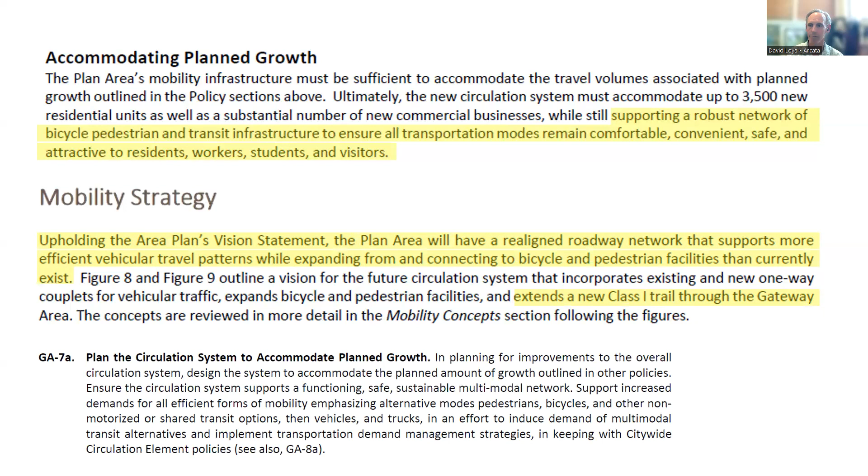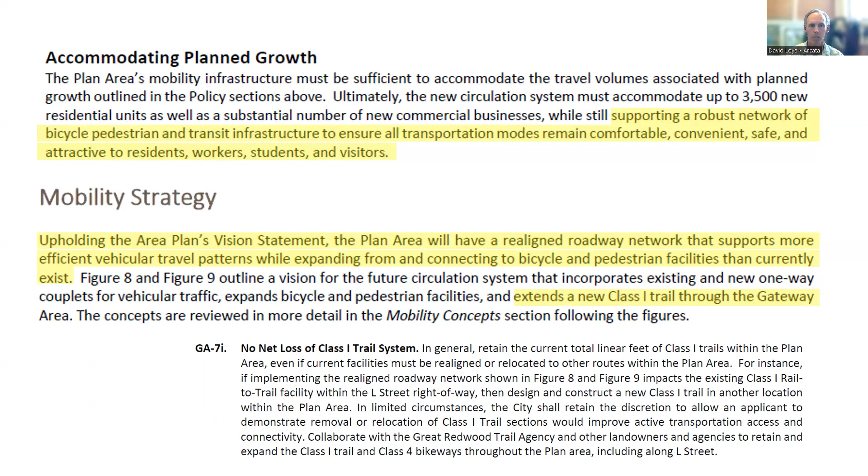Looking at the proposed language the Planning Commission recommended to the City Council regarding the planned circulation network and trails specifically, Planning Commission and committees recommended the transportation system emphasize alternative modes over vehicles in policy GA7A. The Commission went on to recommend no net loss of the Class 1 trail system. These are the multimodal trails you see along Foster to L Street and out to the Bay Trail. So no net loss of these trails.

The policy and strategy are generally depicted in figures 8 and 9 of the plan. Figure 8 shows the planned vehicular circulation network emphasizing the proposed changes. And figure 9 on the right shows the existing and planned alternative modes of transportation, including bike and ped trails. Let's take a closer look at the trails first.

This image depicts the Gateway area and surrounding areas slightly grayed out with the existing facilities, multi-use path, class 2, 3, and class 2 and 3 bike routes and bike lanes depicted in the solid lines. You'll note in the center of the field of view is L Street. The L Street corridor is our current existing multi-use path. That's a class 1 trail.

The proposed facilities are shown in dashed lines in these figures. I want to draw your attention to the number of new class 1 separated multi-use trails that are proposed. Notably N as in Nancy Street, which connects to the west side of the Creamery District, is proposed to be extended from Alliance near Shay Park to Samoa along or near the existing rail corridor. The precise location of these trails will be determined in pre-development planning.

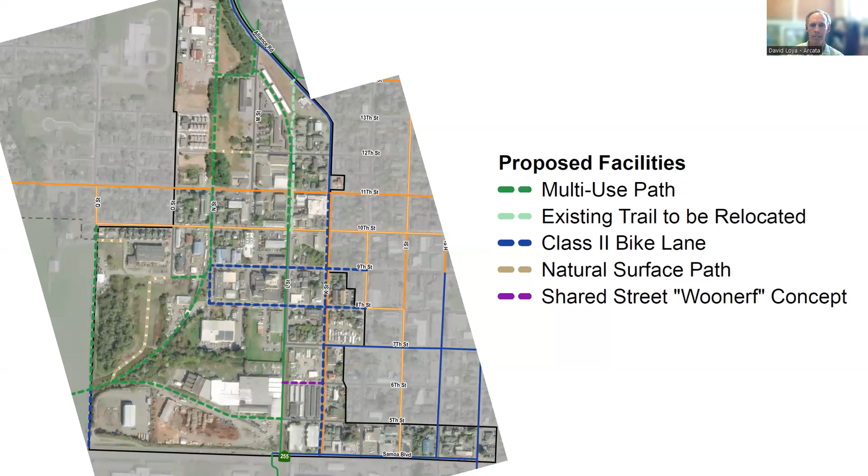Now that we've looked at the trail system and understand that no trails are being eliminated and that the plan proposes the addition of several new trails and bike lanes, let's take a look at the proposed road systems. The road systems are going to have to adjust from their current configurations to accommodate these new trails and to create the types of improvements in safety that we're seeking.

Okay, so zooming in on that map and putting it into the context of the larger area in this aerial image. The plan proposes to continue the one-way couplets in the downtown on 8th and 9th Streets to connect the Creamery District with the downtown. These roads will enhance the walking and biking experience and reduce the drive lanes considerably, emphasizing these alternative modes.

There are several diagrams in the Gateway area plan that you can view on our website to see what's proposed for 8th and 9th Street, but I really want to emphasize and focus on the K and L one-way couplet that's being proposed because it's been the focus of community dialogue to date.

Let's start by looking at the existing conditions on K Street. Currently, K Street works well enough for vehicular traffic. There are north and southbound lanes and parking on both sides of the street. While the current level of service, a measure of traffic congestion, does result in some peak flow traffic impacts, these levels are considered acceptable locally. The city has a long history of accepting poor level of service as part of its travel demand management and mode shift strategies. The idea being that folks will use other modes of transportation if vehicular traffic isn't working for them.

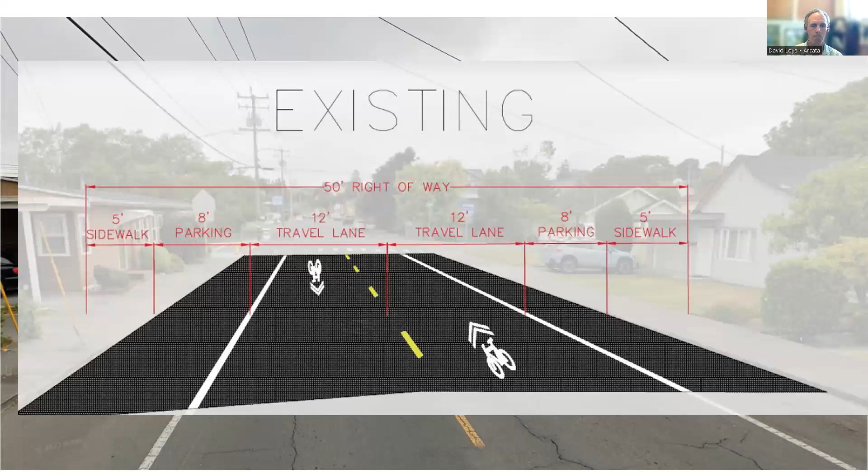For pedestrians, the situation is acceptable, but it could be better. There are 5-foot sidewalks on either side of K Street, and the crosswalks are well marked. However, crossing this street requires approximately a 40-foot path of travel across 2 ways of travel lanes and 2 rows of parking. So there could be improvements here.

Again, one of our main objectives in updating the mobility network is to enhance the walkability and bikeability while improving the connectivity between downtown and the Gateway area. Currently, to make that transit from downtown to the Gateway area, you have to cross larger crossings with longer pedestrian exposure. And there are several design elements in the proposed plan that help to resolve these concerns.

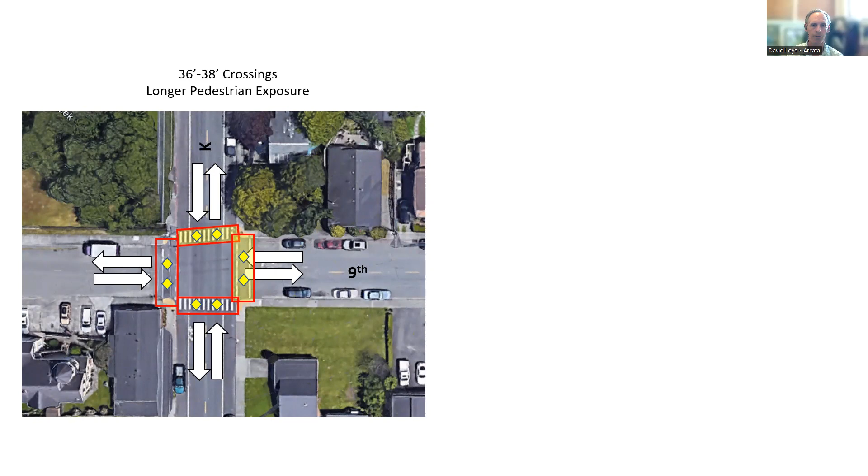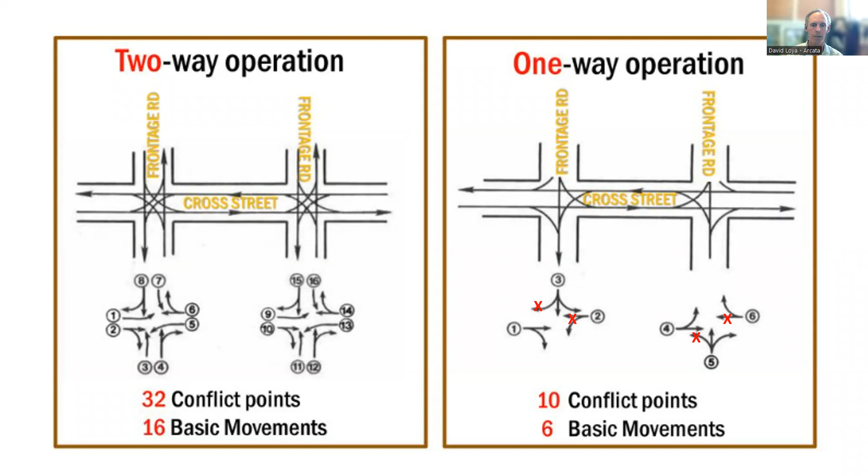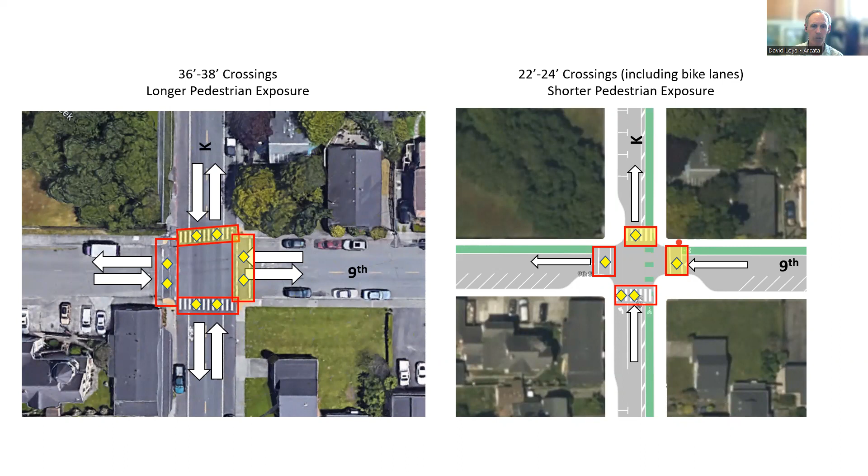Here you see the current on the left and proposed crossings for K and 9th Street. The number of conflicts is greatly reduced here by reducing transit from 2 lanes both ways to 1 lane one way. Again, this is a very well-designed set of one-way couplets where the number of conflicts is greatly reduced. There are separated bike lanes on both K and 9th Street. Crossings are reduced to a maximum of 24 feet, and the bulb outs and crosswalk design help calm traffic as it approaches these intersections.

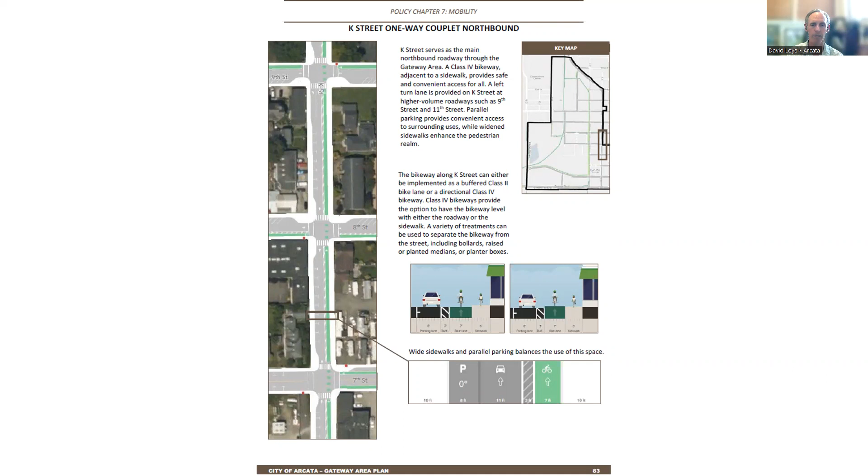Let's take a look at what the plan proposes for K Street. From this vantage, you can see that K is proposed as a one-way northbound with either a separated or completely segregated bike lane, wide sidewalks with bulb outs at intersections, and parking on one side and high visibility crosswalks. Let's take a look at a typical cross section.

Now this is the plan view and a visual with the rendering of northbound one-way on K Street. By creating one way of travel, you reduce the travel lanes considerably, creating plenty of room for doubling the size of the sidewalks on both sides of the street. So instead of 5-foot sidewalks, we have 10-foot sidewalks planned.

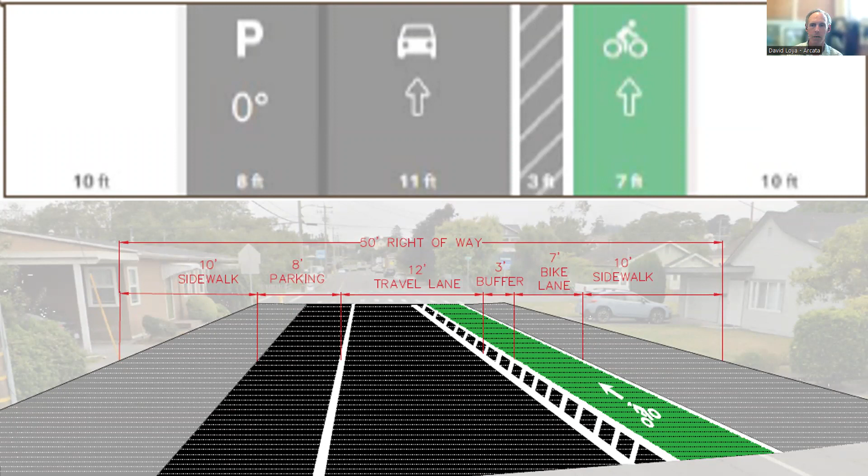There is also added room to create a wide unidirectional bike lane and a buffer. Now this bike lane can be either just separated by that buffer, or we can enhance that separation further and create a full class 4 bike lane here. And this proposal does retain parking on one side.

If the plan view and the visualization didn't work for you, looking at the street view, here's another visualization of a typical for K Street. And again, you'll note that the class 4 segregated bike lane is created by elevating the bike lane to the elevation of the sidewalk instead of requiring the bike lane to be on the same level as the road. That creates that segregation. You'll note also the broad sidewalks and one drive lane here.

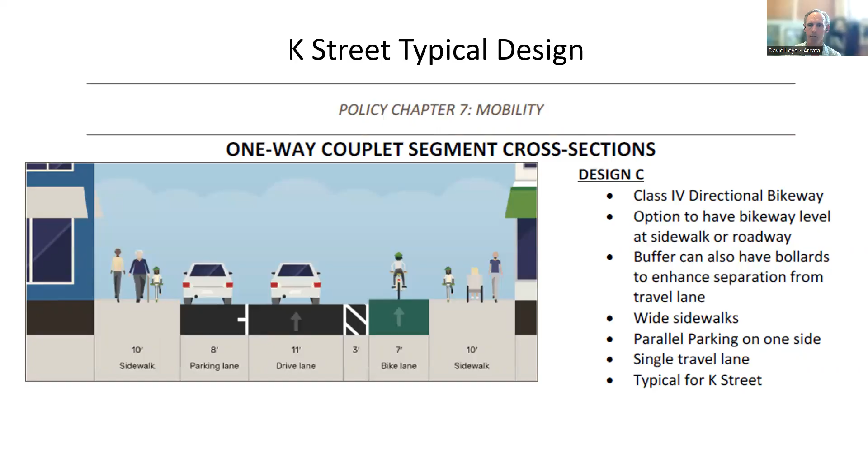Now let's look at the proposal for L Street. We'll take a look at the alternatives in a moment, but first I want to review the current condition of L Street and what the gateway proposal recommended by the Planning Commission is. Currently, L Street is open between 11th and 7th to local traffic only. There are bollards preventing traffic from entering at 11th Street. The road is open on one small segment north of 11th Street, but it's otherwise impassable by vehicular traffic.

This is also where the current location of the L Street portion of the Bay Trail is located. It's concurrent with the road on this segment. This portion of the Bay Trail, as well as the second segment between 10th and 11th, are actually shared with the road. While this is an extremely low flow, local traffic only portion of L Street, the trail is not technically a class 1 multi-use trail in this segment since it's on the road.

The reason I emphasize this is because the gateway proposal does make this segment fully segregated from the road. And so the current experience that you have entering the road and sharing that low flow traffic would be eliminated in the future, and the trail along the entirety of L Street would be completely segregated.

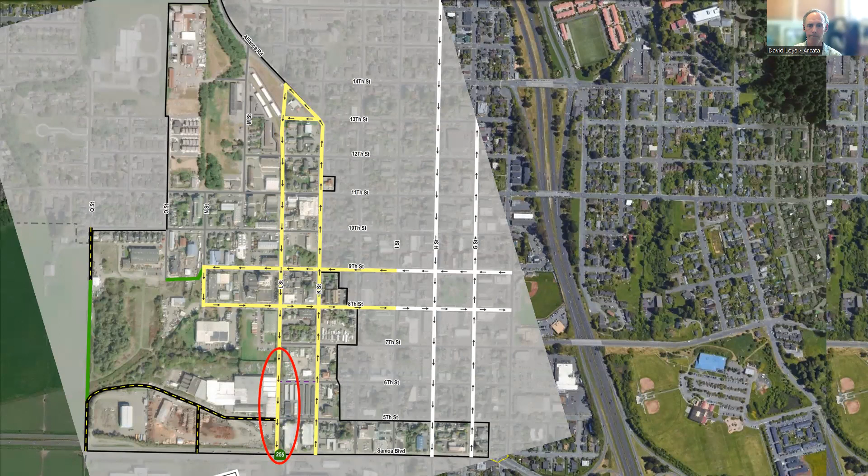Okay, getting back to L Street for a second here, L Street also does not extend south of 7th Street. So there are current gaps in the flow of traffic from L Street, some created by our bollards, others that are just a factor of L Street never having been developed on those segments or having been abandoned. On the portions of L Street that are open to vehicular traffic, there are 2 vehicle lanes going north and southbound and 1 parking lane.

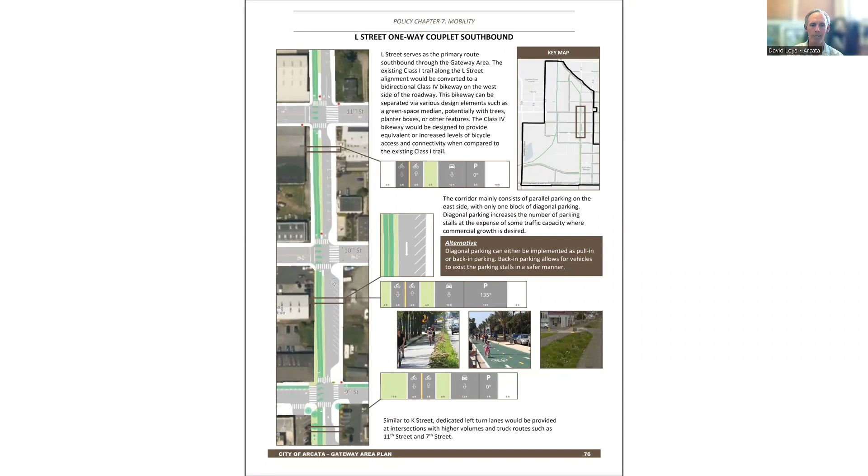Let's take a look at what's proposed in the plan. Again, you can see from this vantage that much of the proposal for L Street mirrors the K Street in many ways. There's 1 lane of traffic, southbound this time, broad sidewalks, bulb outs, and high visibility crossings. The one notable difference is the existing multi-use trail remains, and it is enhanced by the gateway proposal. Let's look at the plan more closely. I'm going to zoom in on this plan view.

You'll note that this plan view shows the orientation with north up. This would put the Creamery building on the left side, but let's look at this as the plan would be viewed southbound, the way vehicular traffic would flow. So we'll turn that all over. The plan calls for retaining and expanding the public sphere on the west side of the trail to enhance the linear park features that currently exist.

Some properties have already contributed to a park-like feel. The Creamery building, for example, has maintained landscaping, benches, public art, all of which have the feeling that that landscaped area, which is actually on private property, is part of the public sphere. The plan calls for expanding and adding to this, requiring developers and property owners to contribute area to the west side of the trail to create that broader linear park feel.

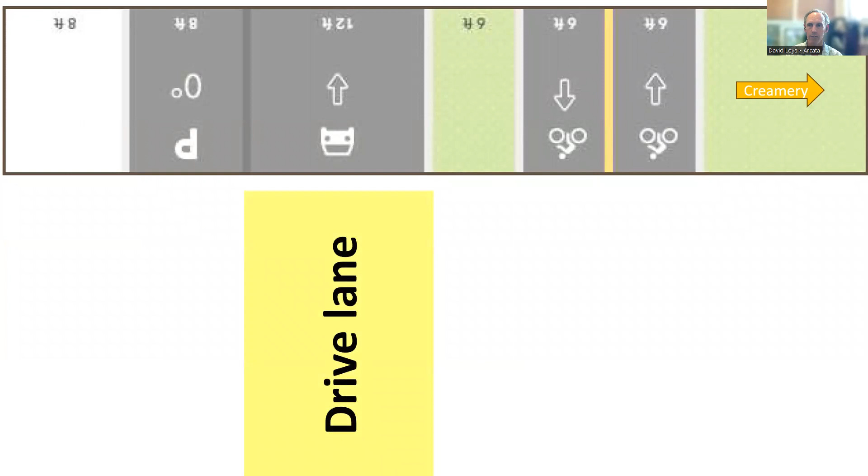The plan proposes retaining the multi-use trail, as I've mentioned earlier, and the vegetative buffer, creating that separation from the travel lane. It does propose to open a single drive lane headed southbound and retain the parking. Lastly, it retains the sidewalk. Let's take a look at what that might look like on L Street south of 8th. You can see here that there's really not much change to the existing physical conditions, some restriping, repaving to touch up the road and that sort of thing.

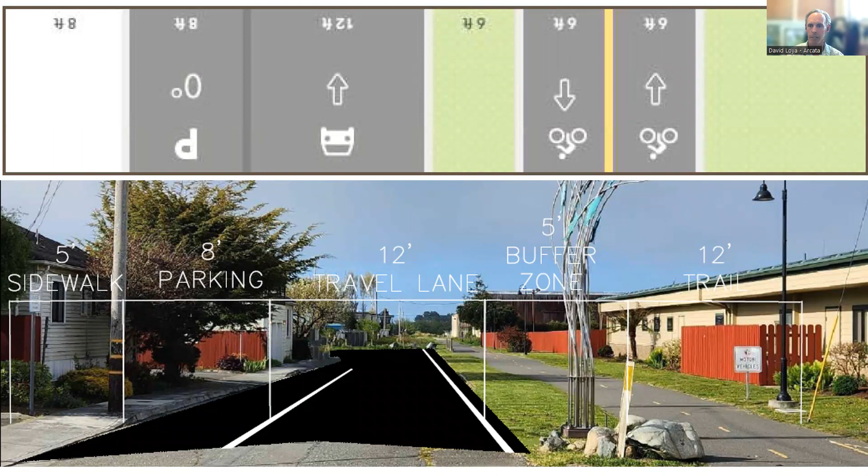And while this would become a primary southbound road under the Commission's recommended proposal, the road design would emphasize reducing travel speeds through several road design elements, some of which we've already discussed, like narrowing lane widths, bulb outs, and other environmental design elements. So you see here the trail is retained, the buffer zone is retained, one direction of travel instead of two. This would be through traffic, not just local traffic, parking, and then sidewalk.

Looking again, image from L and 9th, here's another way of thinking about it. The existing travel lanes would be converted to one-way, southbound with a parking lane next to it. You'd keep the vegetative buffer, the trail, the separation, and the sidewalk.

I want to close out this review of images by looking at, again, the L Street typical design. This is included in our Gateway Area Plan. Showing, from left to right, the planting strip that would be on the west side of the trail, separated vegetative buffer, drive lane, parking lane, and then the sidewalk.

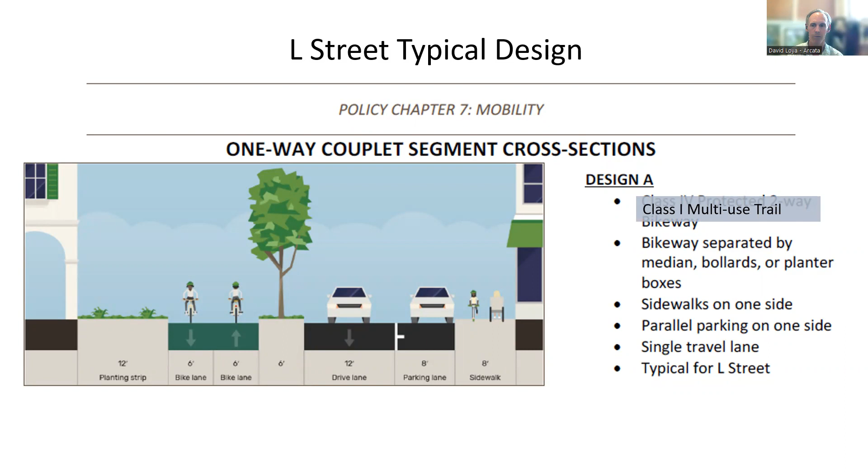I want to note that we're talking about retaining a Class 1 trail, not a Class 4 protected two-way bikeway, and so that will remain a multi-use trail. It would not be converted to a bikeway.

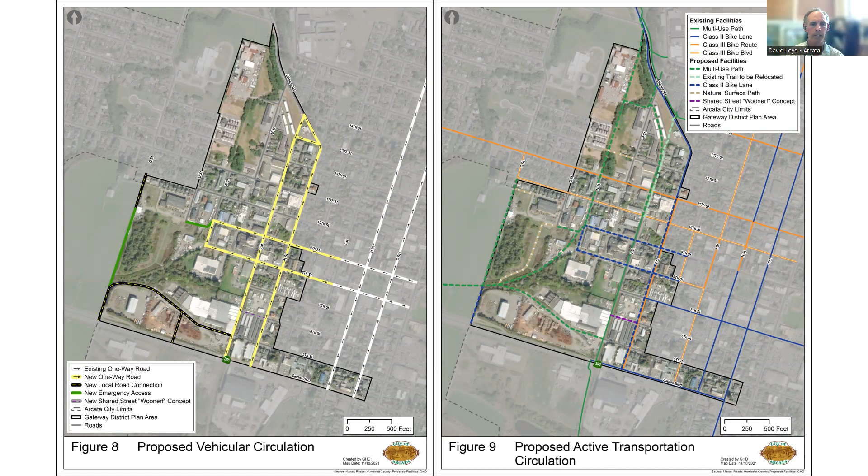This wraps up the discussion on the proposal, and I hope this helped explain the relationship between the trail, the bike lane, sidewalk improvements that are designed to improve user safety and comfort, and the proposed redesign for vehicular traffic as proposed in the Gateway Area Plan. I also hope it's clear that the city is not proposing to remove any multi-use trails, and to the contrary, the proposal is to improve the trail network, adding several multi-use trails and several bike lanes.

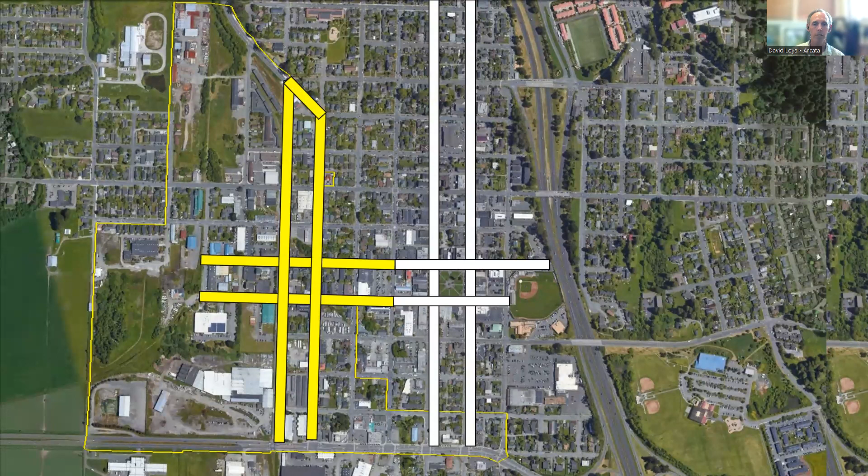Now let's take a look at the alternatives that were considered before settling on the K&L Street couplet to accomplish the alternative transportation goals of the community. Again, the purpose is to create a safer, more balanced in terms of travel mode and intuitively connected downtown and gateway area. I'm going to focus on the K&L couplet exclusively and the alternatives there for this discussion.

For alternatives to be effective, they would need to accomplish several mutual goals. First, the alternative needed to meet the safety and convenience goals for alternative modes of travel. We've seen the intersection improvements, road width reductions, sidewalk width increases, and other features that create safety and convenience for bikes and peds previously. Any alternative that we evaluated and recommended had to retain these.

Second, the alternative would need to support the infrastructure. This may seem like it goes without saying, but there are lots of routes that have been proposed that actually won't support the infrastructure ultimately that we need to build out this safer future.

Next, the vehicular routing needed to be efficient and effective. Now, some have drawn criticism against this because they say we should not be focusing on the efficiency of vehicular traffic. But the efficiency in terms of a couplet is affected by the distance between the north and southbound segments. And if the planned routing becomes too convoluted or too distant, then people will choose non-planned routes, which create traffic and safety impacts that were unintended.

And so for this reason, we wanted to make sure that vehicular routing was at least efficient enough to retain the effectiveness of that couplet and make sure that people took the planned routes that were established in the plan.

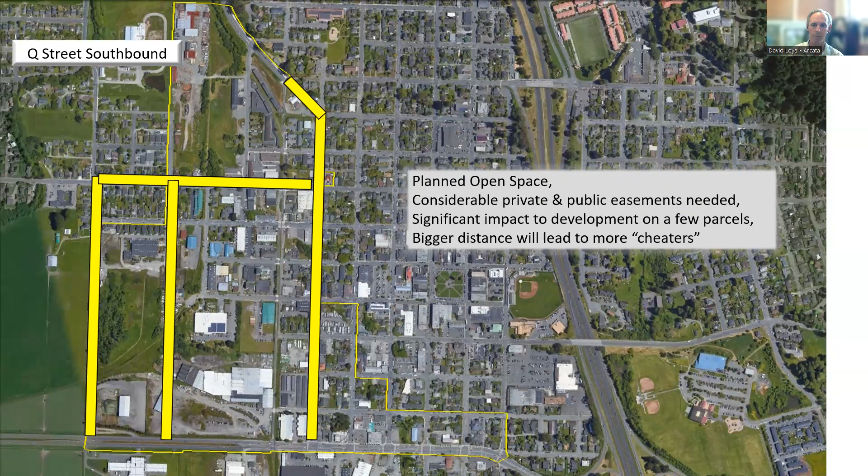Q and O have similar features. O Street is a possible alternative that was also similarly rejected because it's not as supportive of those goals and principles as L Street. Now, I do want to take a look at J Street with a little bit more attention. J Street was considered an alternative early on, and it would accomplish many of the goals and is a fairly attractive option from a mobility standpoint.

The J Street option would affect more than twice the number of current residences, however, and it's not a commercial corridor or planned one. And it would likely create more cross traffic seeking to get from J Street to the Gateway compared with L Street, which is located in the planned activity center already. Notwithstanding, J is a viable alternative to L for a couplet.

There are other ideas that have been raised that were not further evaluated because either they didn't meet the principles outlined above and the alternative transportation safety goals, or because they were variations on the theme that we've already evaluated. For instance, one alternative suggested was to make K a one-way northbound and to not designate a southbound couplet to K, letting individual drivers decide which route to take. We did not explore this further because we viewed this as planning for unplanned routing and would necessarily lead to those unintended consequences.

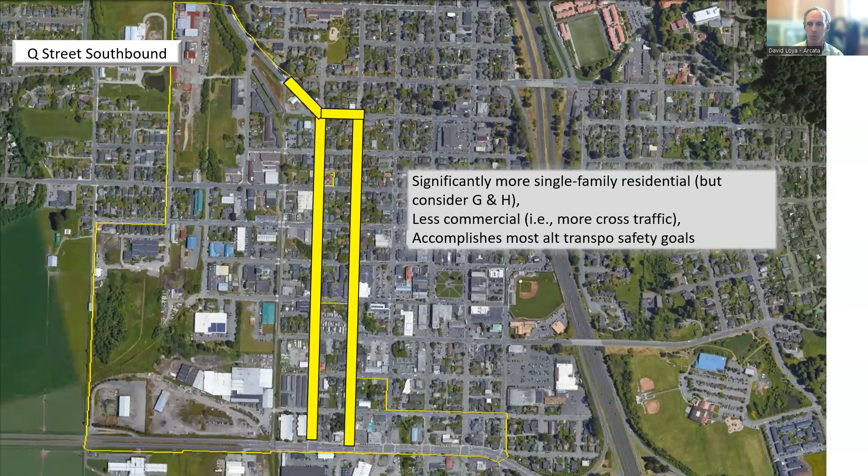So there were several alternatives that are not discussed here further that you may have heard discussed in the public discussion thus far, but this is where I will end our alternatives analysis. We did discuss alternatives to improving K Street. Staff provided several options for modifying K Street, and these options were evaluated primarily because the timing on L Street development is unknown. And so K Street will likely have to serve in the near term while easements are acquired or L is being developed. Also, we would need to have options for the near term for modest improvements to safety and traffic management on K Street, recognizing the challenges that I pointed out earlier in this video.

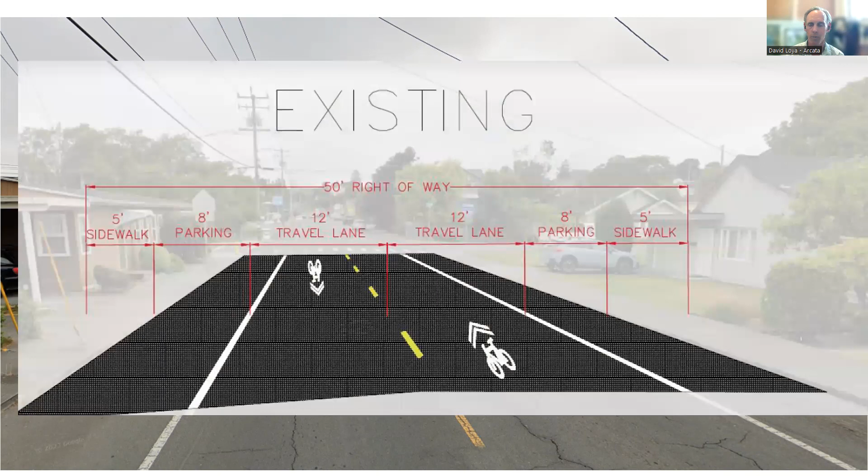To do that, I wanted to go back to the existing conditions to start the comparison. So again, we have 5-foot sidewalks on either side, 8 foot of parking on either side, and 12-foot travel lanes within the 50-foot right-of-way. One option developed by our engineering team provides two-way vehicular traffic on K Street, so it retains two-way traffic, adds bike lanes, and retains one parking lane. This option improves bike safety for sure, but it does not change the conditions for the other modes, and it does not reduce the number of conflicts at the intersections.

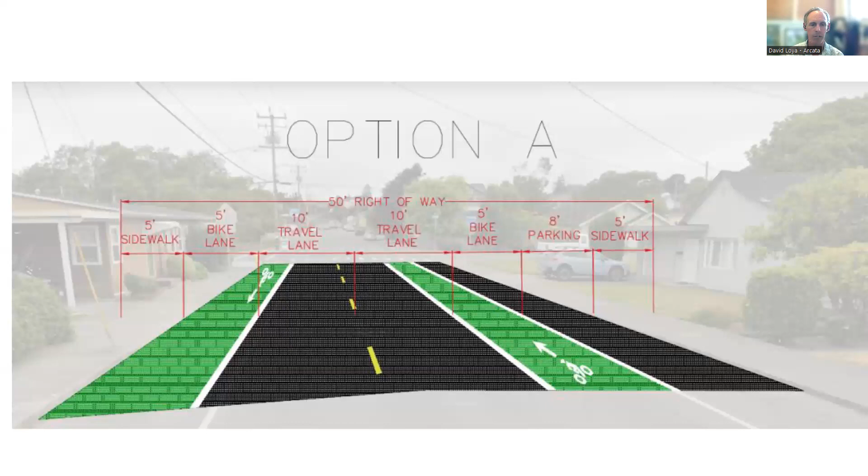This is a good interim option for enhancing bike safety, and the city will need to engage the public regarding the decision to eliminate parking and to add these bike lanes before implementing this. This option is, however, inferior to the proposed gateway plan couplet idea, and it does not meet most of the goals and principles outlined in the plan in this presentation.

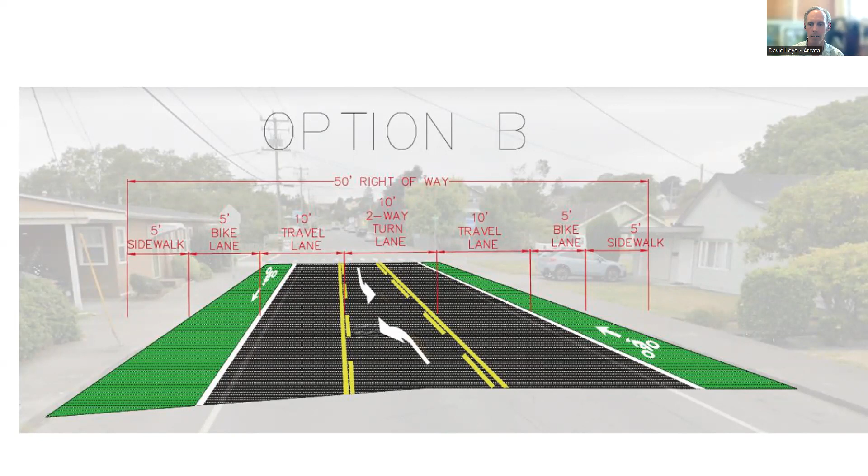Another alternative that we evaluated adds a turn lane to the two-way K Street option. This may be required if growth and densification create unacceptable traffic due to turning movements off K Street onto the downtown and gateway areas. This is also considered an interim option, and this alternative also does not address the safety and convenience goals connecting the downtown. In fact, because you're adding that third turning lane, you're actually exacerbating some of the conflict points and making it more difficult to cross and use K Street as a non-motor vehicle.

This completes our review of the alternatives considered. Staff and the consulting engineers have proposed the K and L Street couplet because it meets all of the goals supporting the alternative transportation modes, creates a superior alternative for bike and ped safety, and meets the design and development principles for feasibility. The Planning Commission reviewed these alternatives and concluded that the K and L Street couplet should be the policy direction for the Gateway Plan.

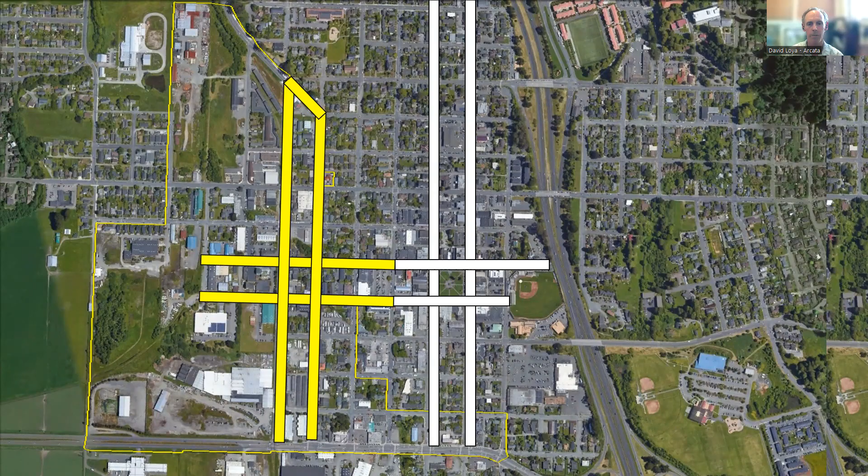I hope this review advances the conversation and clears up some misconceptions about what's actually being proposed. In addition, the rationale for the proposal, as well as the alternatives review, along with the Commission's recommendation, are now in one place instead of scattered over several meetings. We hope that this enhances the conversation and provides people the information they need to make appropriate comment on the proposal and the decision makers with the information they need to make final policy decisions.